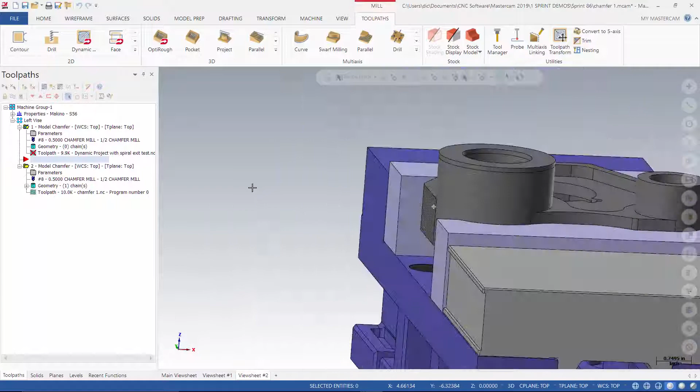When you have conditions where you're concerned with gouging, like for example, if I want to chamfer this front edge as far as I can without violating any of this model, that's a very difficult thing to do with the standard chamfer functionality in the 2D contour. And the same thing if I wanted to put a chamfer on this edge as much as I can safely. I'm worried about my tool hitting this feature here and hitting this feature here.

So we have this new toolpath that will work on a single solid, and it will work with solid chaining. If we look at the toolpath type page, we can input a chain. We will also include the solid the chain came from automatically, and you can introduce some side clearance of the flute of the tool, and you can even select additional solids to stay a certain clearance distance away from.

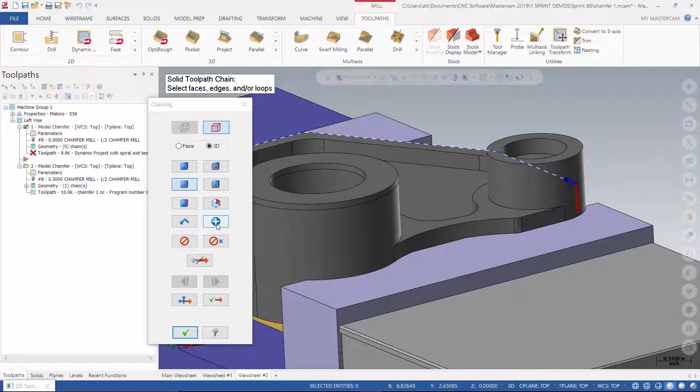So I'm going to come in and do a linked edge chain. I'm going to pick this edge here, and I'm just going to pop that around like so, and I'm happy with that. And then I'll apply it, and I'll put one here as well.

I'm going to ask for a clearance value. Let's say 0.05. I'm not using any avoidance model. As far as tools go, this toolpath only supports the chamfer tool type. So I have a 1/2 inch chamfer. It doesn't matter if it's a 45 degree or 60 degree, whatever it is, it's fully supported.

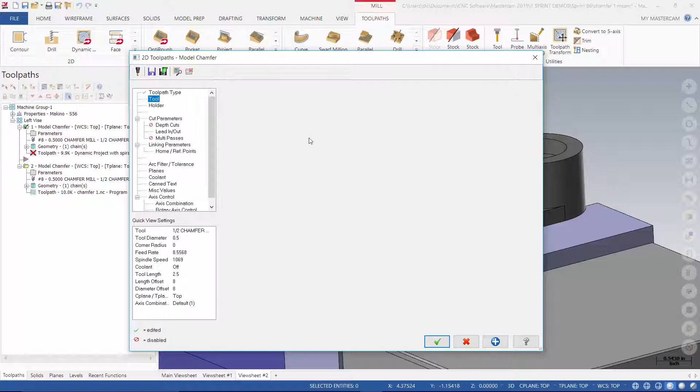In this first technical preview, you do not have the ability to check your shank and holder, but in a future technical preview, you will have full holder and shank collision enabled.

The cut parameter page is very reminiscent of the 2D contour cut parameter page. Here's my stock to leave. And my requested chamfer width, I'm going to put a 50 on that sharp corner, and I like the top of my tool to have like a 30 thou offset below it.

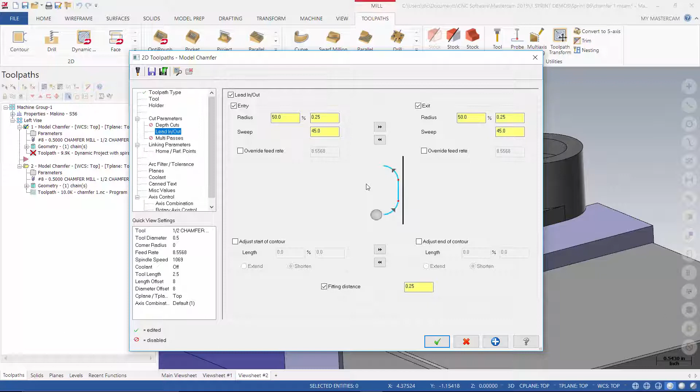We support depth cuts. We support new lead in, lead out technology. This is fully gouge checked. I request an arc in and an arc out. And if that arc in or arc out is going to gouge...

I can request a fitting distance trim. So in this case, 1/4 inch, is the distance that it is allowed to trim the chamfer motion in an effort to fit the arc on safely. And if this simply is not enough to arc on safely, Mastercam will simply plunge and cut the chamfer. So this value allows it to shorten the chamfer toolpath until that arc can safely happen. And I'm telling it, you can't shorten it any more than 1/4 inch.

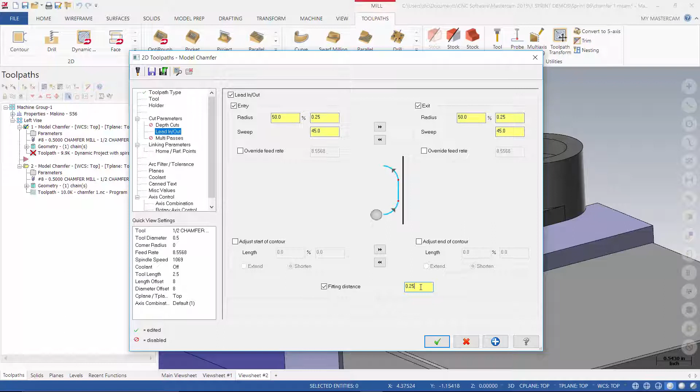And of course, we support multi-passes if you wish. And a very simple linking page. Just give it a retract, give it a feed plane. It's all completely gouge checked. Nothing to worry about with your rapids.

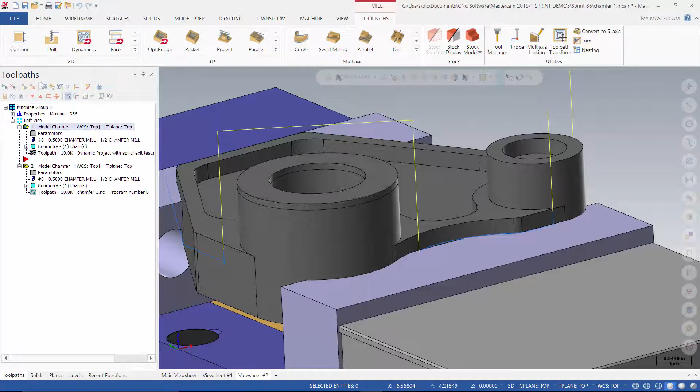I create the toolpath. There's my result. And if I backplot and I bring that tool down, you can see there's some clearance here, that 50 thou clearance, and then it starts to go ahead and arc in, cut my chamfer, and again safe, and it arcs out.

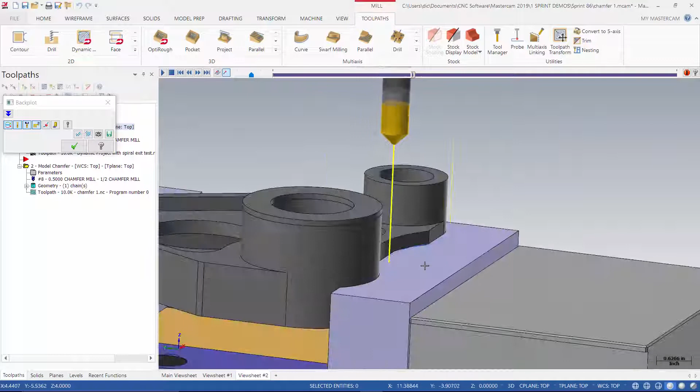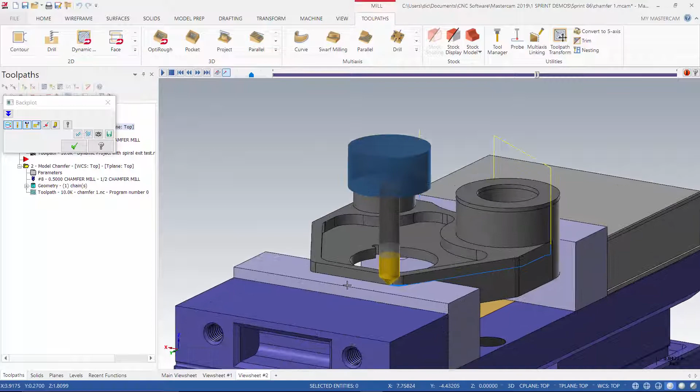There's that 50 thou clearance. It's going to come down here again, safely move in, cut this chamfer all the way around. My tip is clear here because of my offset on the top. But if I was concerned about that, I could easily pick my part of my vise here as an avoidance. And it goes around and around, and then it will exit.

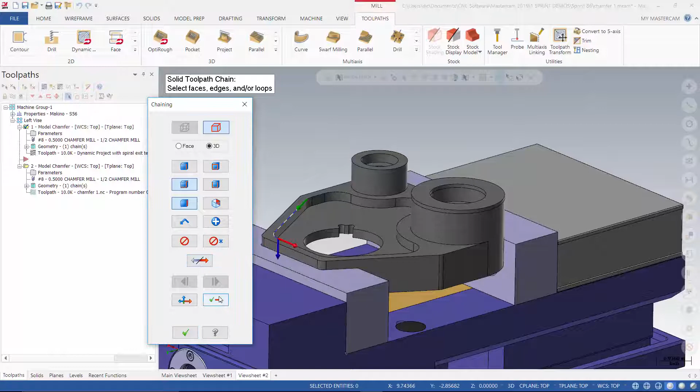So that really simplifies putting a chamfer on a model when you're dealing with a true solid and you're in a complex situation. Now, what would happen if I was to come in here and chain all? What if I was going to do this one? I'm going to reverse it. I'm just going to move it around. And there we go. Cut direction is very important.

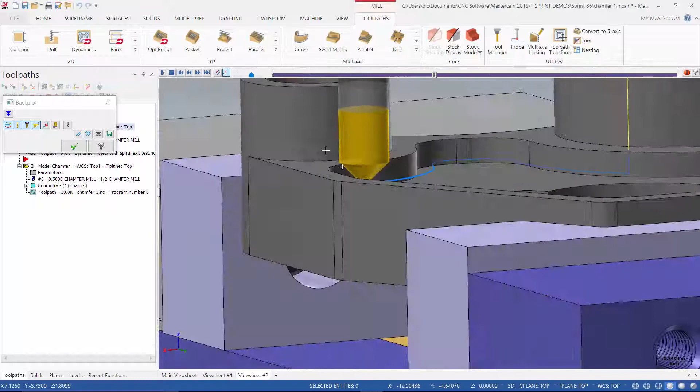We are looking at the chain from a left compensation standpoint for climb cut. So that chain direction is correct. And I just regenerate. And you'll see that I must be safe. I must not be hitting this. Fast forward, I'll put it here, and you can see that I am very far away from there. So let's try to cause a potential problem there.

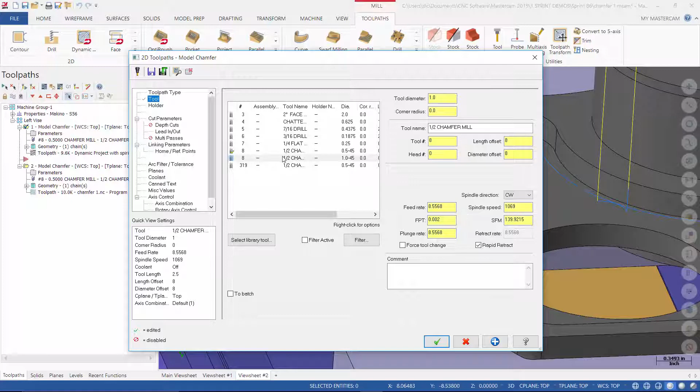I'm going to make this tool quite large. That should cause some type of an issue, right? And we'll create that as a new assembly. I'm not worried about changing the name right now, and we'll request a good sized chamfer as well.

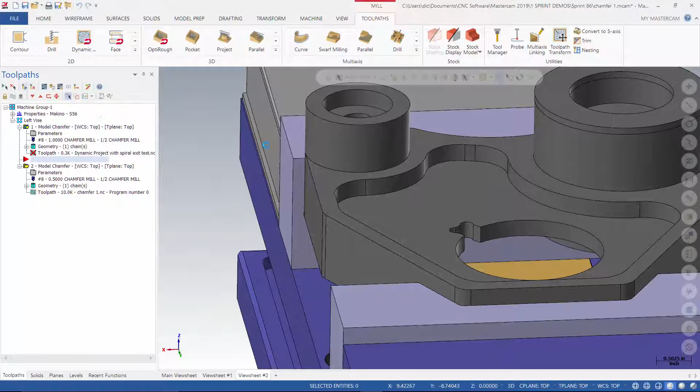And I get nothing, probably because the bottom of the tool is violating this floor. So let's go with some bottom offset, 20 on the bottom there.

And that's all that it can chamfer safely. So you can see it'll come down that big chamfer tool. There's my clearance being respected. You'll also see my arc on and my arc off did not happen here because it needed to trim back more than 1/4 of an inch for that to happen.

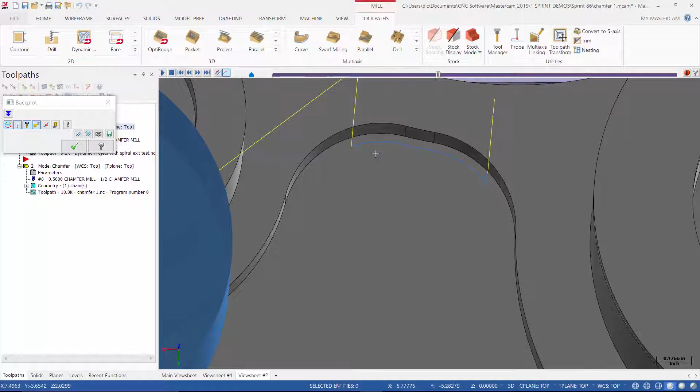So it plunges in and gives me what it can do. And you see it comes over here, again clearing this post, and there's a huge chamfer I'm asking for. And that's all it can do safely. So that's a bit of an extreme example, but just to show the capabilities.

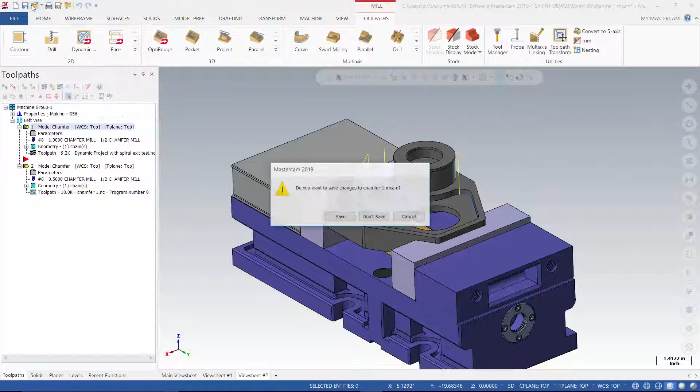And here's another scenario here. Oh, nope, I have it in the same file. So here's another scenario: this model has sharp corners, but what if the model already has chamfers on it?

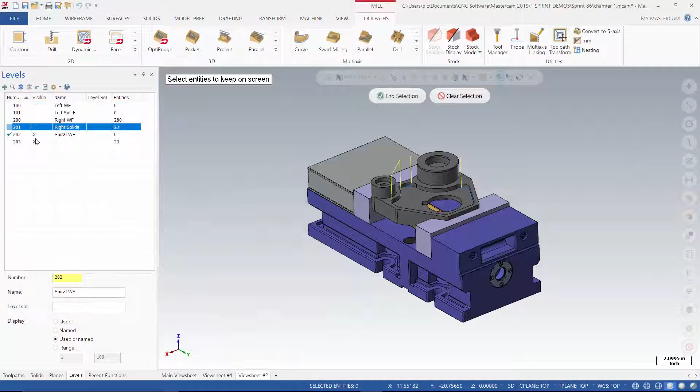And we'll find it. There it is. So we'll turn all this off. I don't think it's there. Oh, there it is, right there. That's my fault. So here we go. So now I have chamfers and I colored them green already.

Nothing changes here. So I'm going to go into this toolpath and pick a chain. In this case, I picked the top rail because I want my top of tool offset to be controlled from here. I could pick the bottom rail when I'm more concerned with controlling the bottom offset.

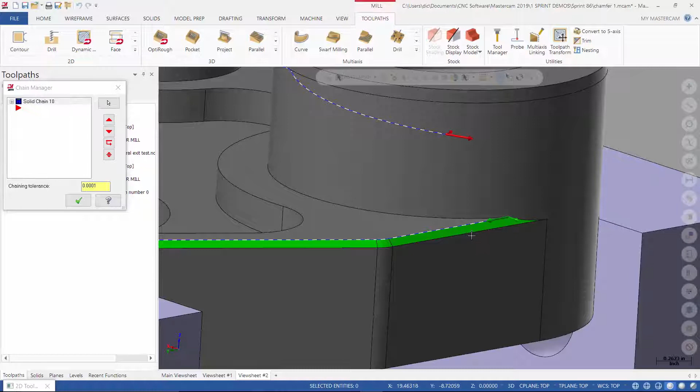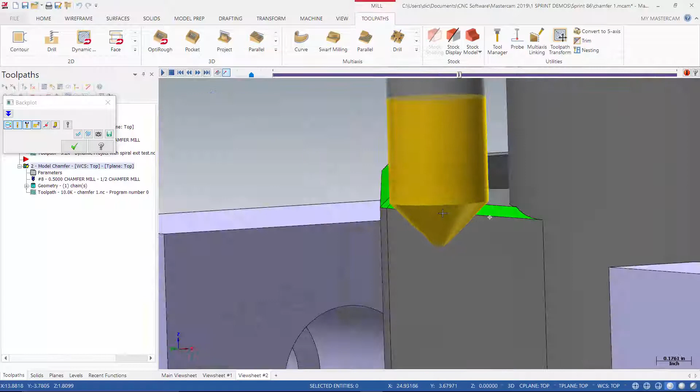So I picked the top rails, and the only difference is you're going to put a 0 chamfer width here. So you put a 0 there, and it calculates and produces a gouge-free chamfer result once again. There it is. Entering on, and you can see how accurate the compensation is, like so. So models with chamfers and models with sharp corners.

Here's another example where we put some avoidance material into the mix, something like this. Now I'm not saying that I would really try to chamfer this with these clamps and on this fixture, but we're just trying to illustrate the gouge-free awareness.

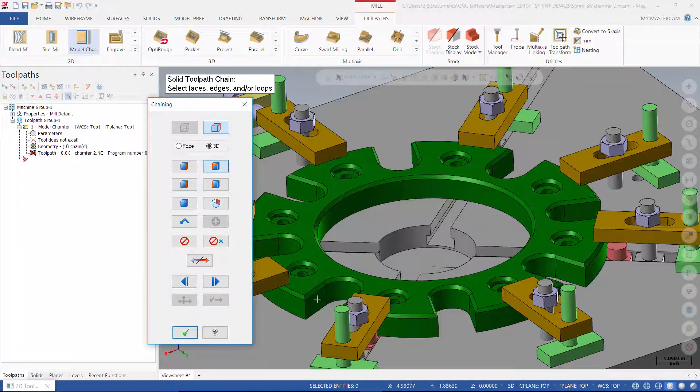So for model chamfer, I'd like to pick this closed loop on top here. So there's my chain direction, so cutter comp left is in the right location. Chamfer tool, it only supports chamfer tools in this first release. So I'm going to grab my 1/2 inch chamfer, or my 1/4 inch, doesn't really matter.

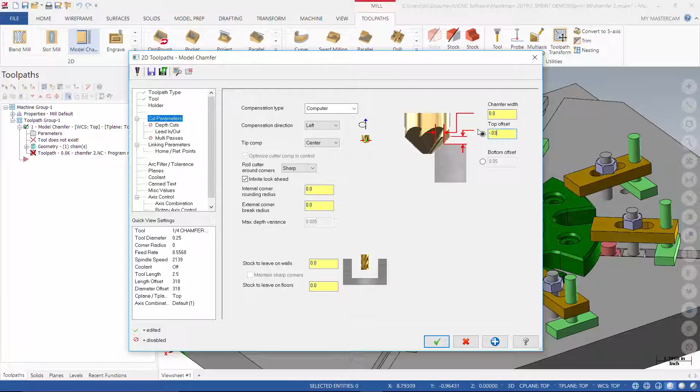And this is a 0 width, and I'm going to control some top offset just below the top of the tool. I'd like it to mill. Lead in, lead out, yes. Maybe we'll change this to 50% instead. Fitting distance, I'll give it a little more room to work if it needs it, and then very simple clearance, very simple feed plane.

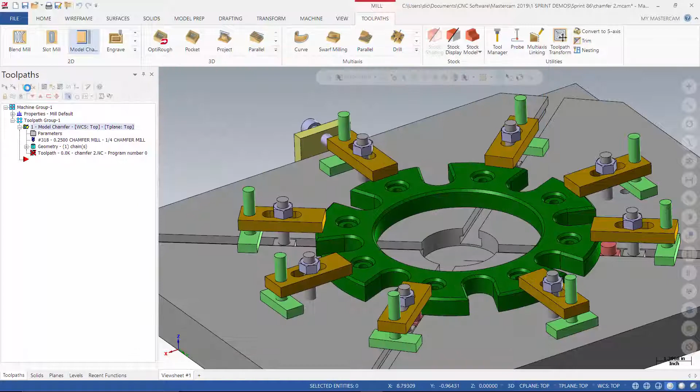And you'll see if I process this that it's just going to violate right through my model, and there's the motion going right through that clamp. I don't want that, right?

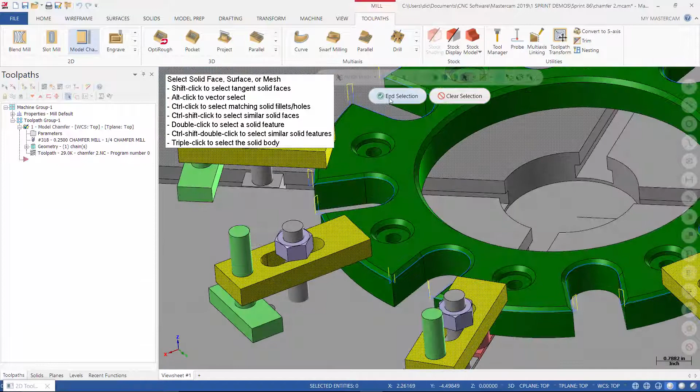So we have the ability to define an avoidance, some more data, and I'm just going to select by color, all those solid bodies there. I'm going to tell Mastercam, look, stay a good 200 away from those. Don't come any closer than 200.

And you'll see my result. And there it is, staying 200 away, like so. And that's accurate.

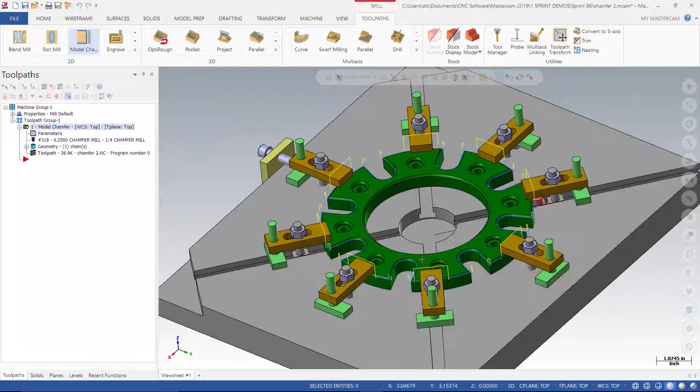So all the avoidance you want, the model is automatically, as soon as I chained the model, we consumed it in the solid model section. If you want to see what it's looking at, you can see it's looking at all that automatically. And that's for side clearance, so any standing bosses, any part of this solid we're concerned about.

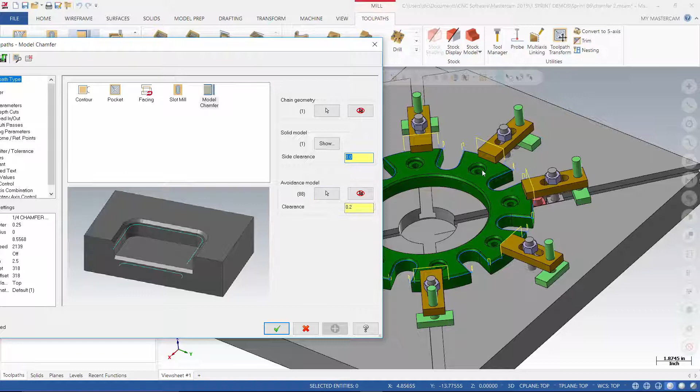If there are additional surfaces, solids, or meshes that we are concerned about, we are free to select them here. We can also select faces of this solid as well. And that would be an example like this,

where I've got a really nasty little situation going on here. All right, so I chained this flat chain. Mastercam will throw an error if the chain is not flat. It must be flat. And I was just concerned about what's going to happen here when this starts to chamfer.

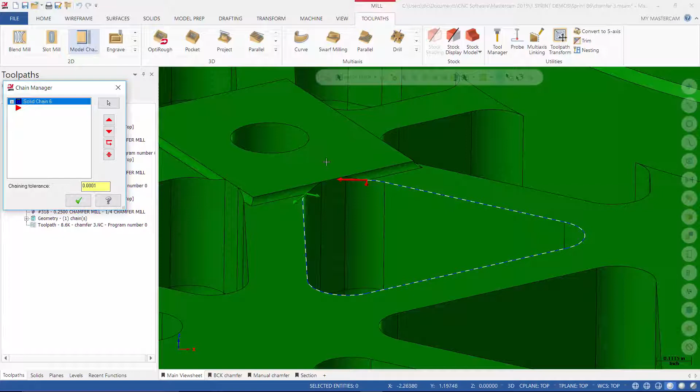So what I did was I selected these 4 faces as additional avoidance areas and gave Mastercam a distance to make sure I don't come near those with the cutting portion of the tool, right? Because this is side clearance, I was worried about the cutting portion here.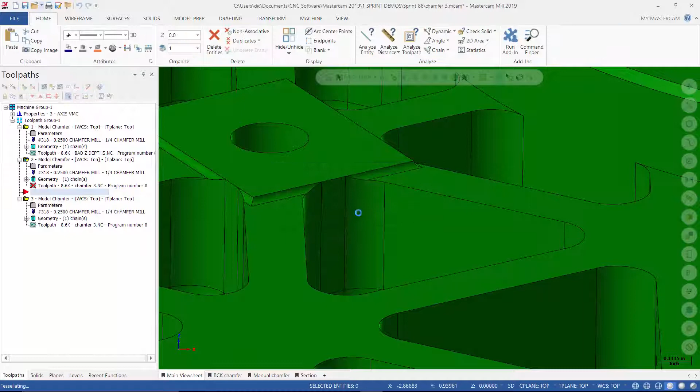And I wound up getting a good result. Bring it in again, I dirtied it. And here it is here. This one here. And you'll see the tool come down.

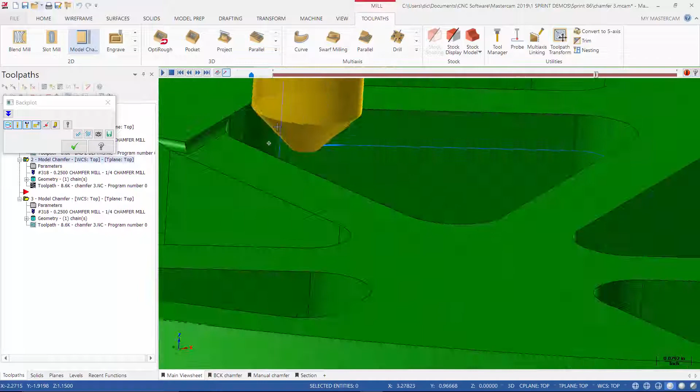And now I am in fact clearing everything as it works its way in, comes around, and then arcs off, and I'm still clearing everything, and I feel comfortable. And this is a pretty nasty little situation to try and do some automatic chamfer.